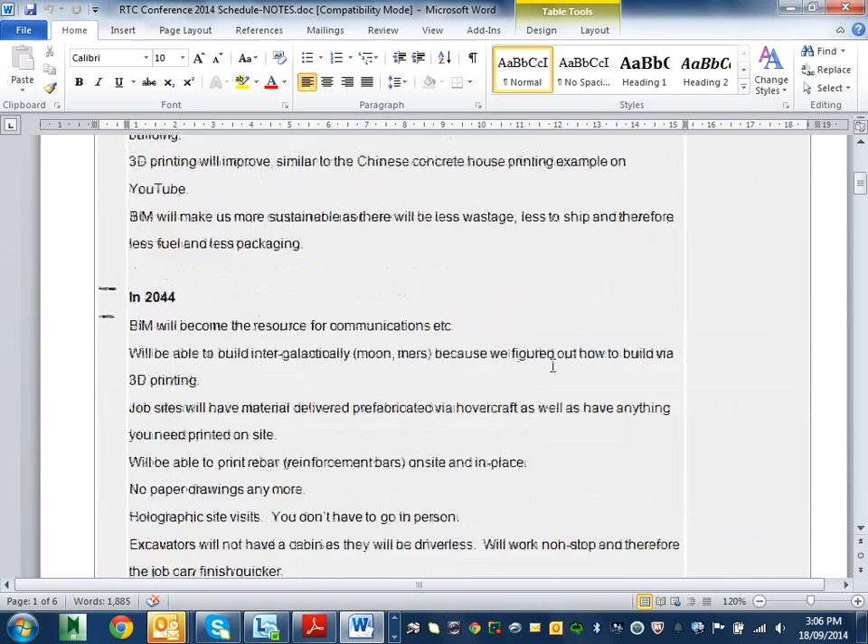We're going to talk about the Revit conference I went to in May. I took a few workshops, and one of them was called Welcome to May 29, 2044, so it's about 30 years from now.

It was presented by these guys here, and I love their little workshops, they were really good. They've had a couple of others that I've taken, fun guys. This is actually a picture of this guy here, that's me, and they belong to a company called Turis Systems. They're from America. This is one of the partners, that's his wife Anne, and that's Mike himself, young Mike.

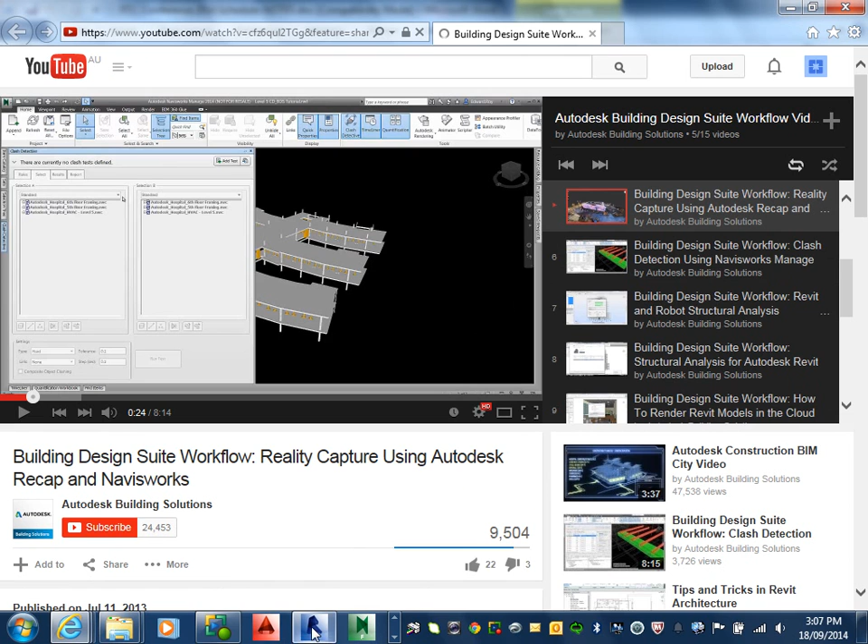I'll just close that. Oops, sorry, it's not happening, close all tabs. Let's just get rid of a few other ones while we're here. Why is this not working? Anyway, don't worry about it, it's a problem with this. Okay, here we go.

And this one here is the other guy, that's young Josh. This is the last night that we were there, we had dinner, and we could let our hair down.

Okay, I'll go on. Why is it... close all tabs? Close tabs? Alright, am I pressing the wrong button or what? I don't know what's going on here. Alright, just keep going.

So basically in 2044 we will have self-driven cars and terabyte internet, really fast internet, that's the idea. Productivity in 2014, apparently they claim, is less than it was in 1964, whereas what we've been just listening to suggests it should be the other way around, but that's what they're saying.

Interesting. They've got a disclaimer at the beginning which they popped up saying do not make any financial decisions based on what we're saying. That's a disclaimer I want to give as well.

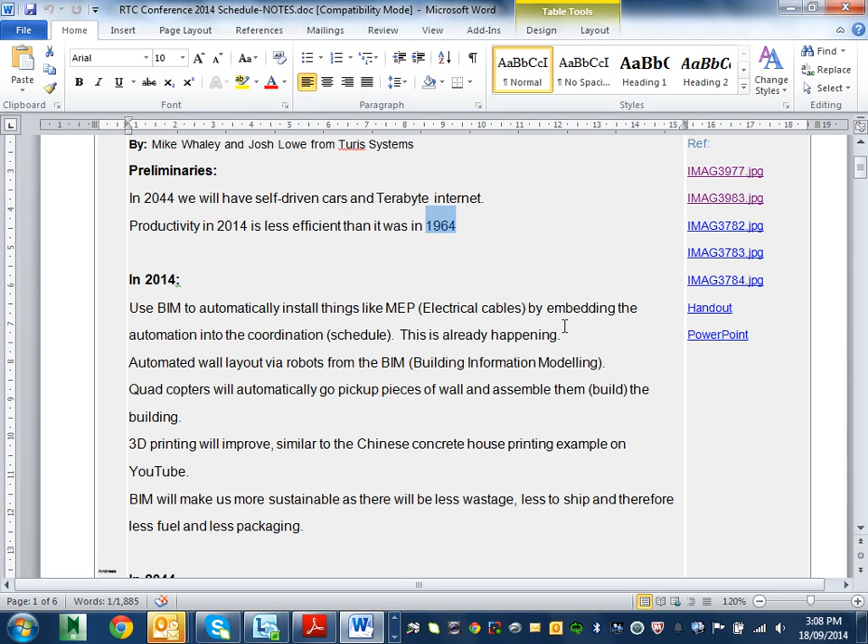Now, use of BIM in 2014, we used BIM to automatically install things like electrical cables and all that sort of stuff, and embed them, because they're automatically in the schedule, you can just embed them in the ground as well. That's the idea, and this is already happening in certain projects.

Automated wall layout via robots from the building information model - they will mark out on the ground where your walls have got to go, and then you come along and assemble it because it will come already pre-assembled, you just plonk it there. So that already happens.

Big Allen key. A big Allen key. Yes.

Well, I think IKEA will start selling some buildings, maybe. Instead of tents, they're selling buildings, yes. I've seen some of those designs as well that are 3D printed, for disaster relief. Interesting.

Quadcopters will automatically go and pick up pieces of wall and assemble them themselves. I don't know what that's doing there, I think that should be further down in the 2044 section.

3D printing will improve, similar to the Chinese concrete house printing example. I'll just YouTube it and you'll find it. I've shown it to my other students earlier, and I might get an opportunity to show you in another lesson.

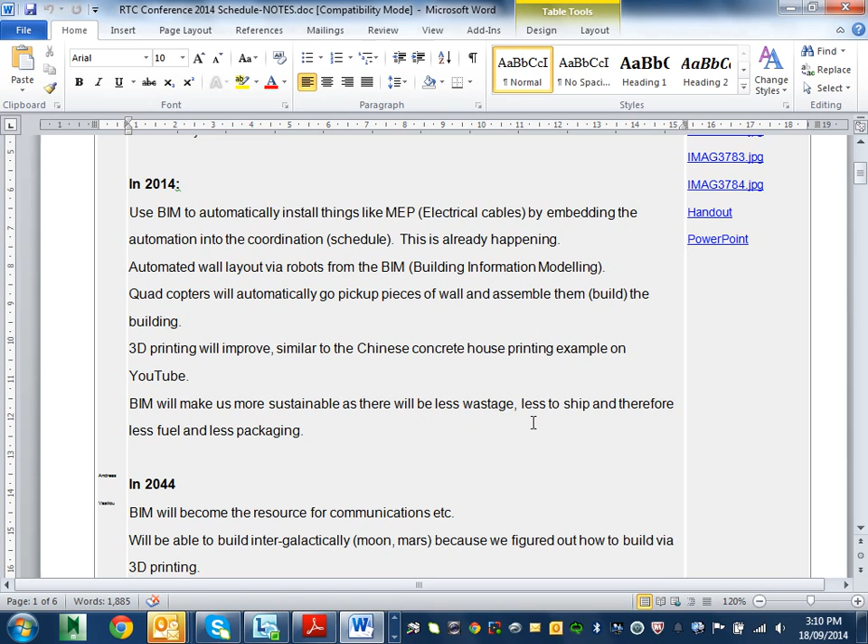Okay, BIM will make us more sustainable. There'll be less wastage, less to ship around, less fuel, less packaging, all that sort of stuff. In 2044, BIM will become the resource for communication, etc.

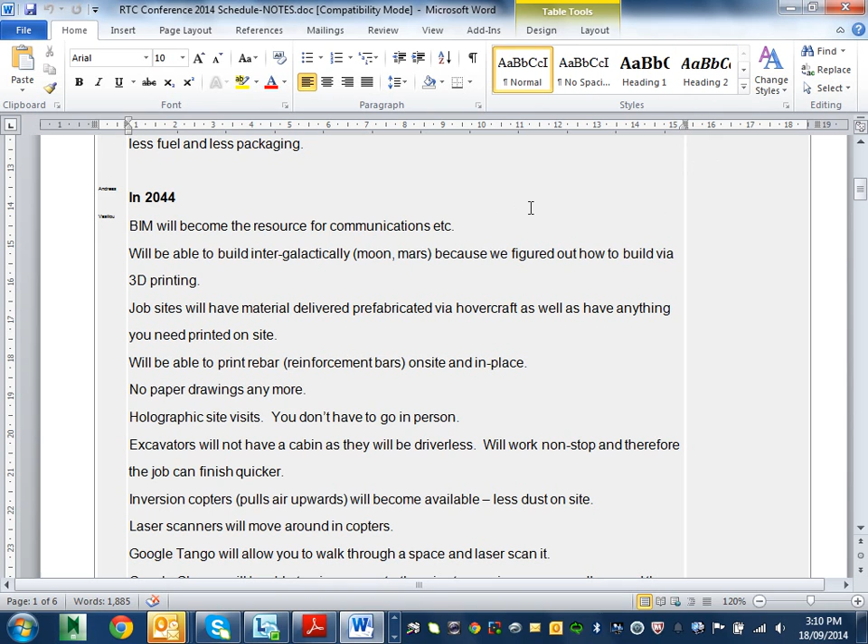This is actually not the best way of doing it, because as I said, these are the guys - this is their view of what Melbourne will look like in 2044.

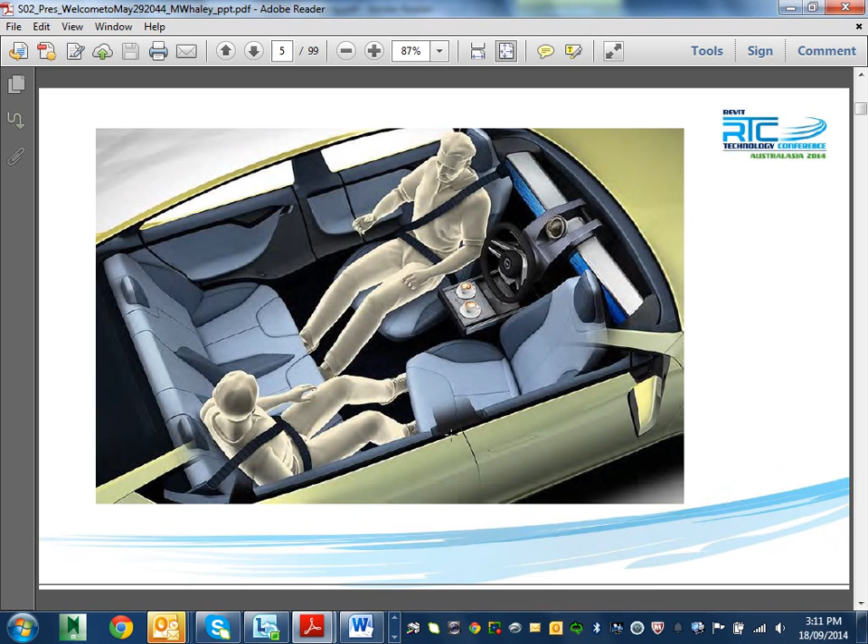Who are these guys? I don't know, I thought it was the Flintstones, but apparently it's the Jetsons, is it? That's it. Anyway, we'll have driverless cars and that sort of thing.

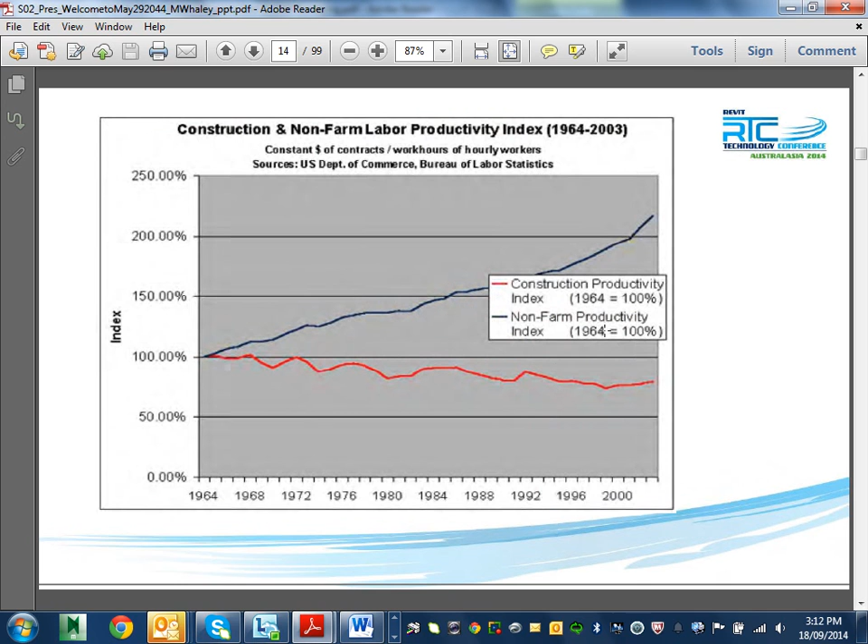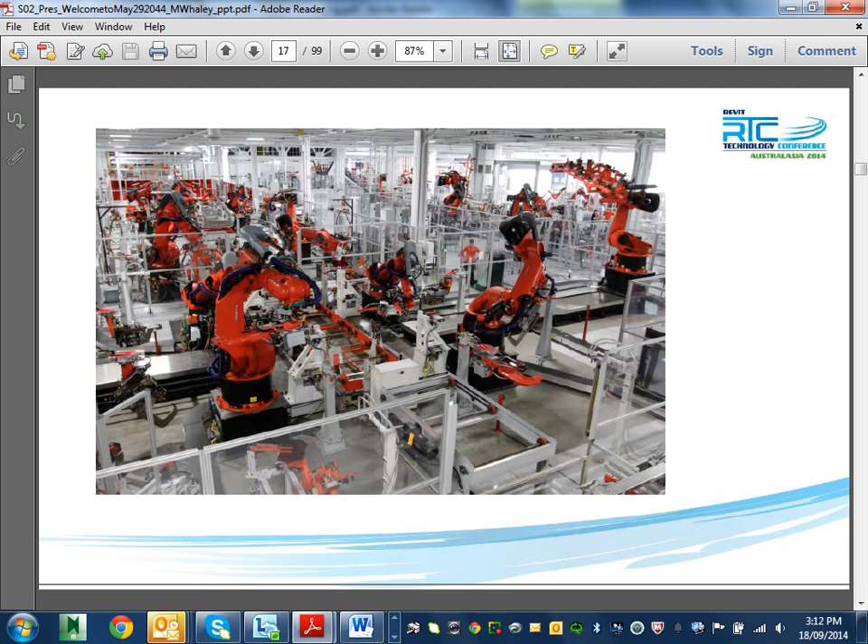This is the 1964 example that they're justifying with their figures. Robots, yeah, we've already got this sort of stuff happening around the house, vacuuming. Automation is already happening in the automotive industry especially, but we're going to see a lot more of that coming into the building industry.

All right, so let's check that out.

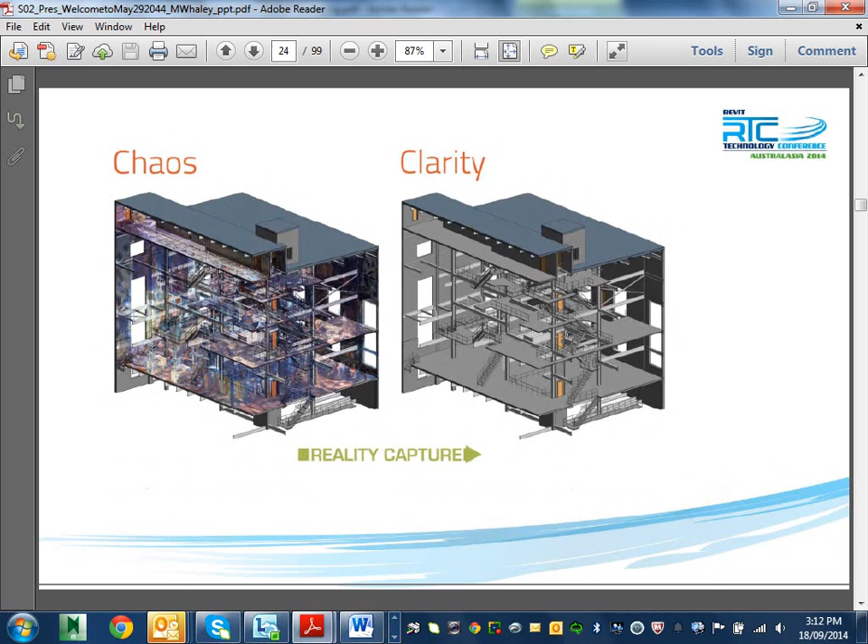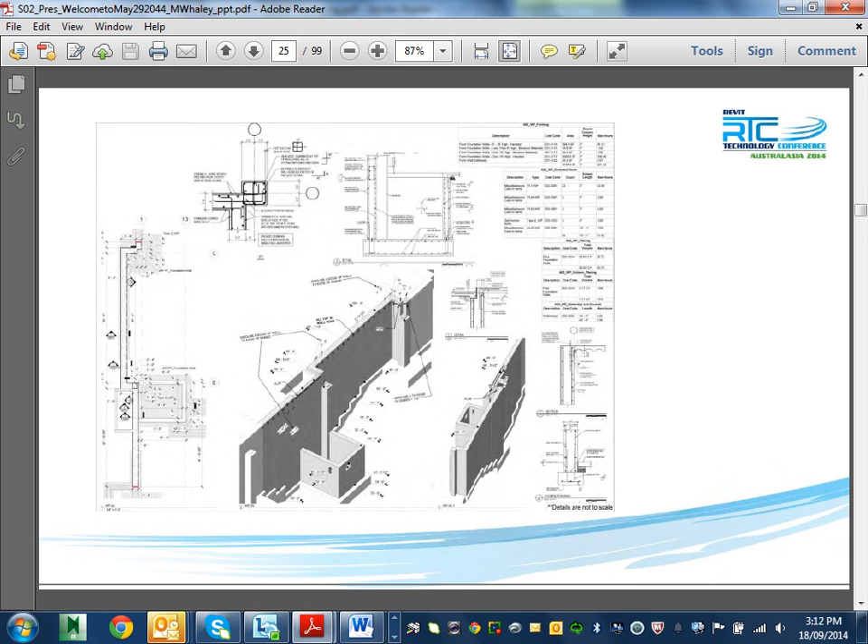All this stuff, as I talked about before, being able to lay cables in and automatically build trenches using programming of the machine - the machines are already doing that. Graders already run by GPS, using downloaded data to work out the level. The driver is sitting in there but not necessarily doing anything with it - it just goes up and down and finds the right level.

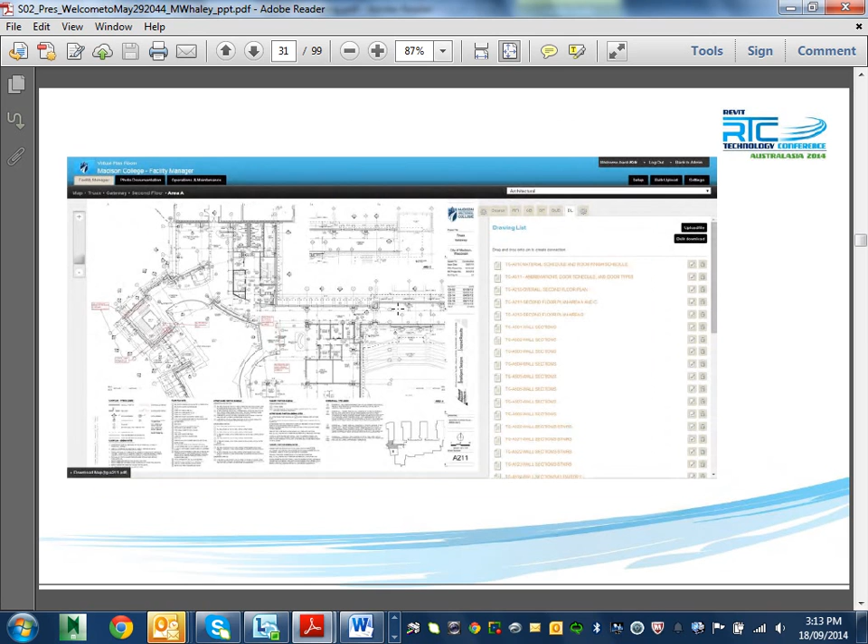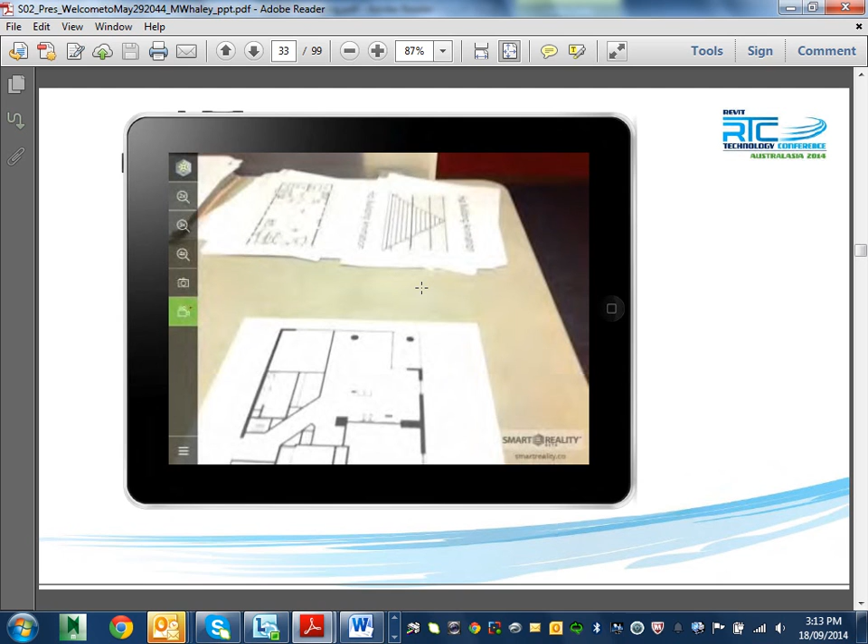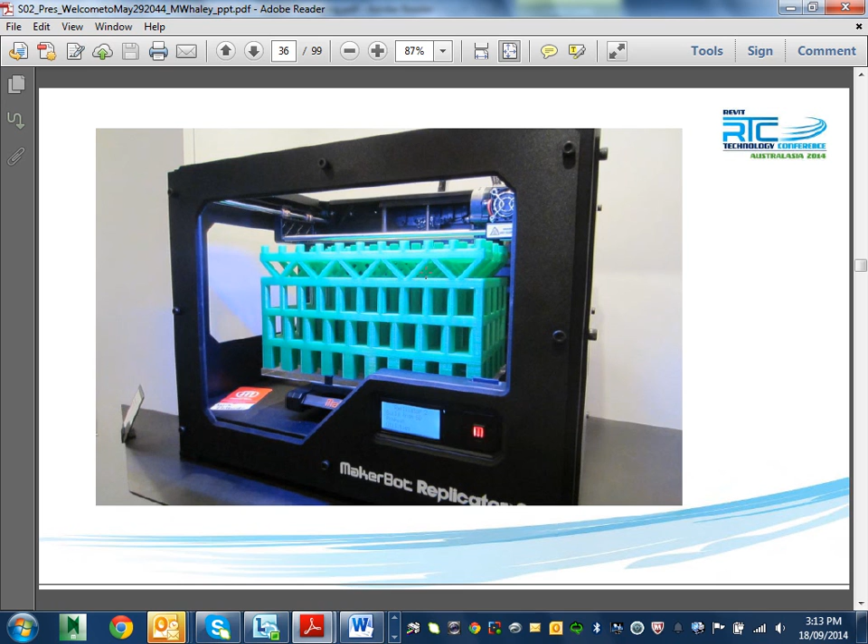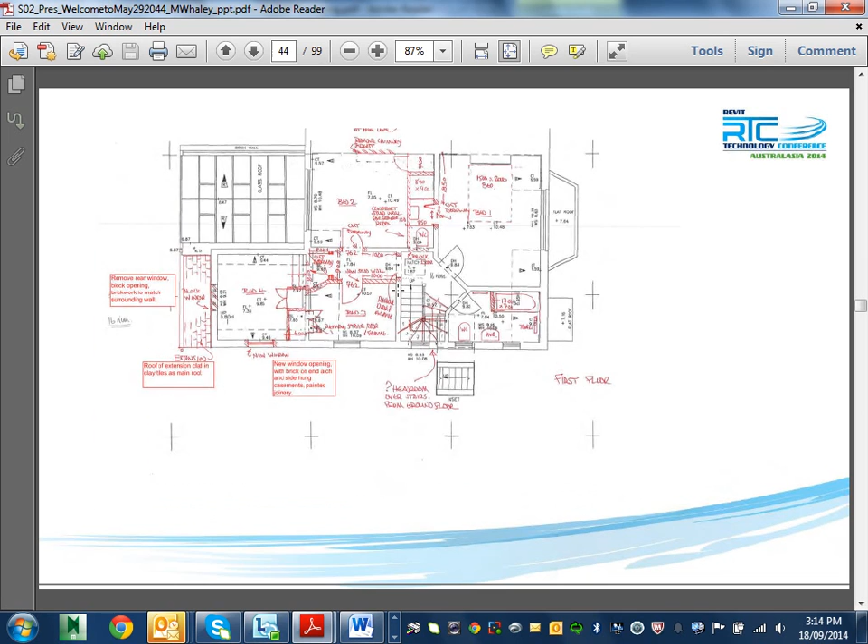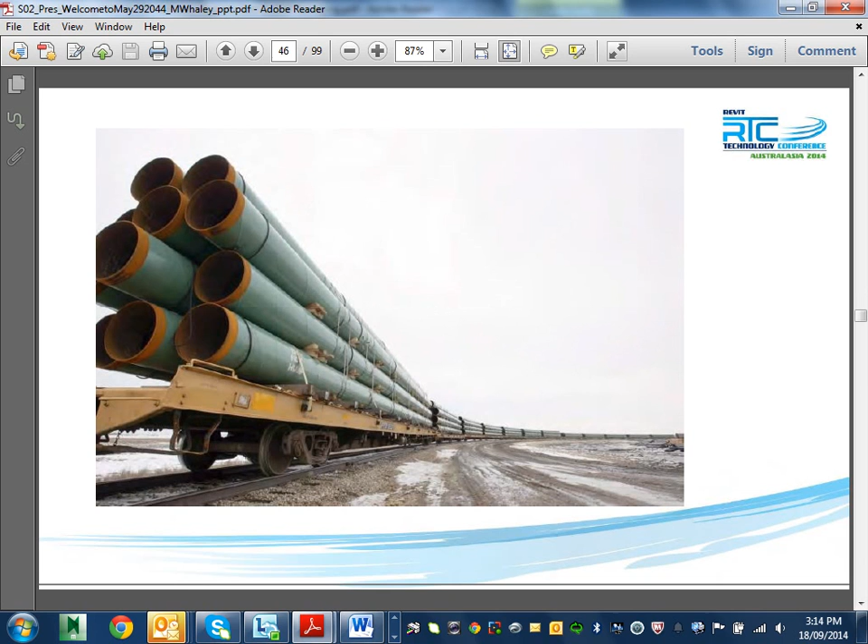That's the state of construction in 2014, or a construction site - all this wastage and mess. That's a drawing office with a lot of files and markups. Yep, danger, transporting stuff, as I just mentioned before. A lot of the materials are going to be able to be 3D printed as well on site. That's the idea - less danger.

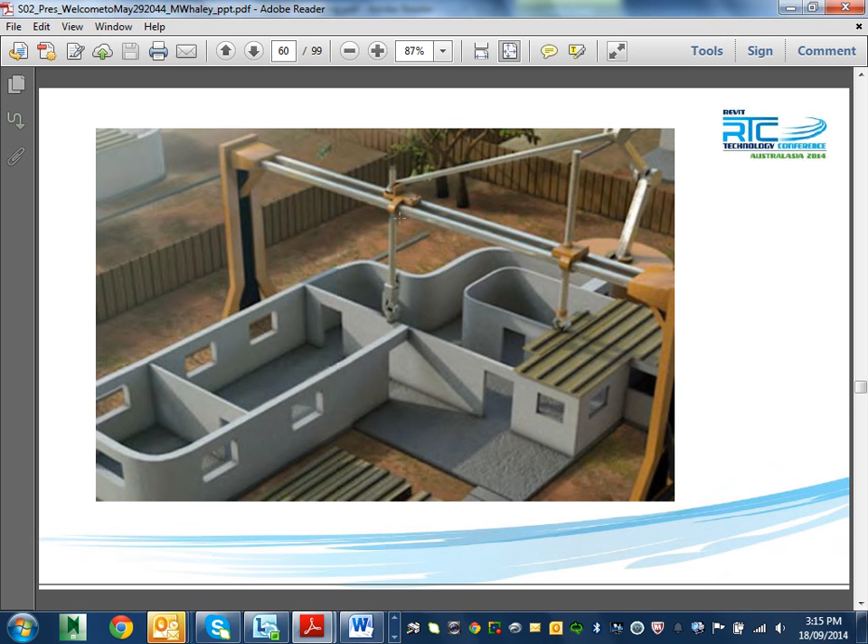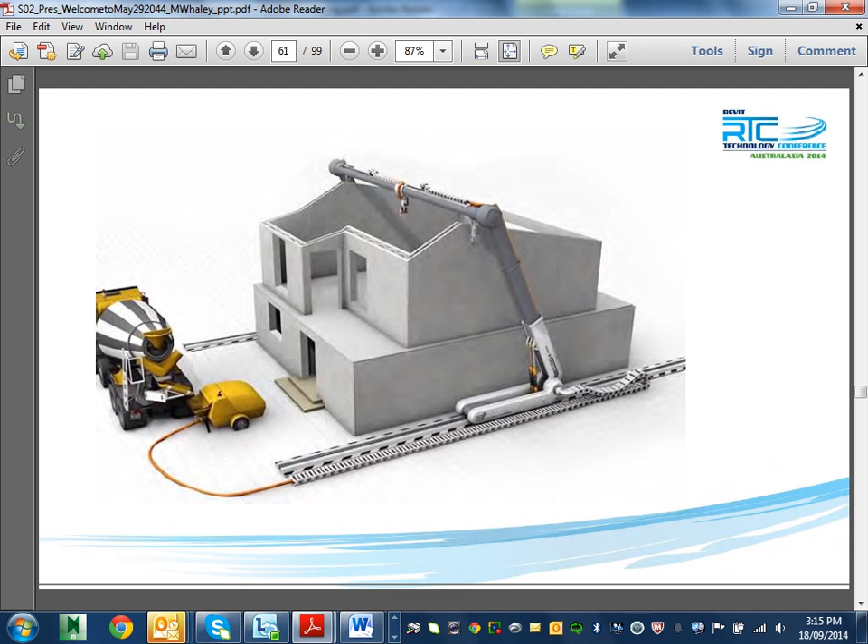Now this is more like what the site's going to be in the future - apparently these quadcopters bringing in all the just-in-time materials you need on site. So there's that, and another 3D printing machine - here's another example of a 3D printing device building a house. It's probably another Chinese one. At the moment, this is where we are - experimenting with different machines and ways of doing it, and there'll more than likely be a few different variations we end up with. Modules coming in.

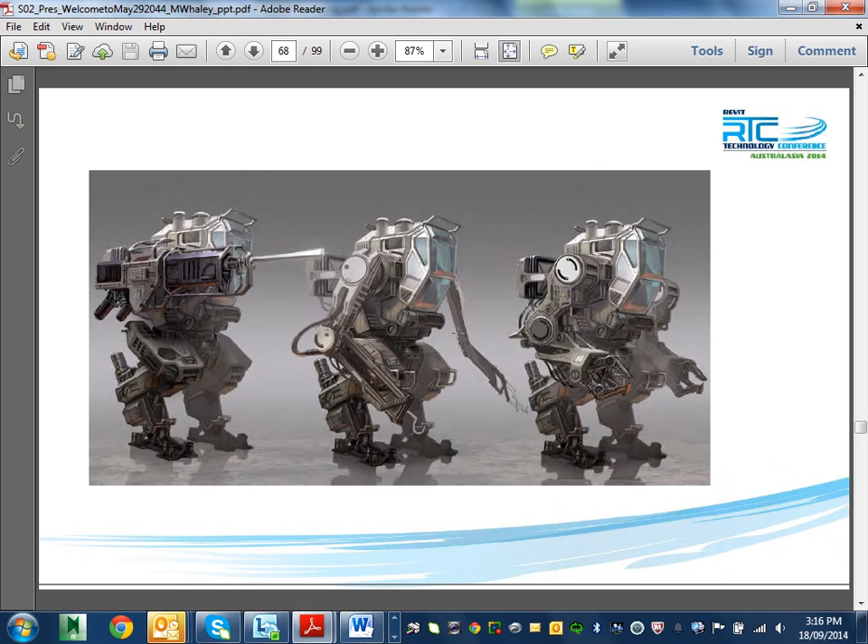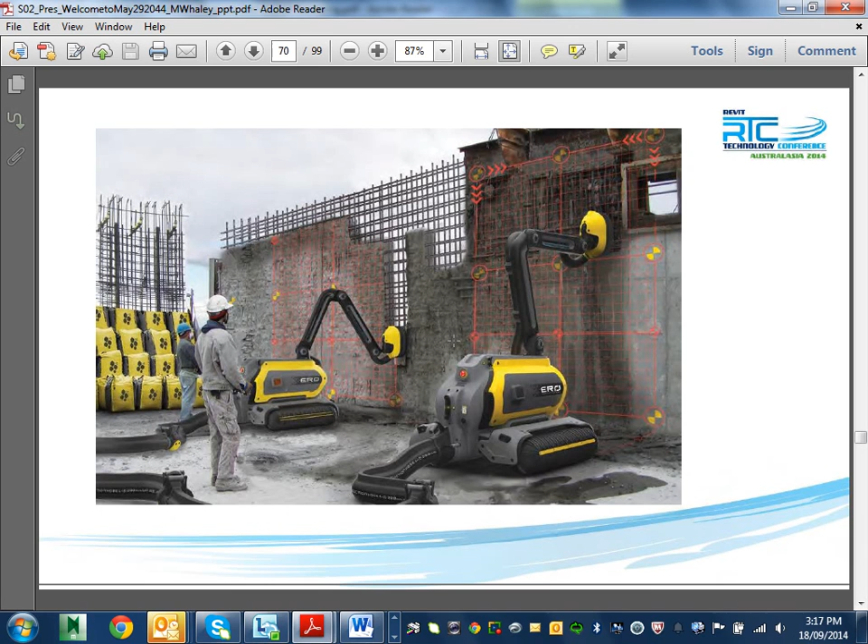Don't know what that is - machines. Okay, I think this is one of the videos I read about just before. That's a layout of the walls, but this is actually 3D printing of walls, so you don't have to do it by hand. There's even a rendering machine - if you put up a wall, a machine goes along and renders it for you.

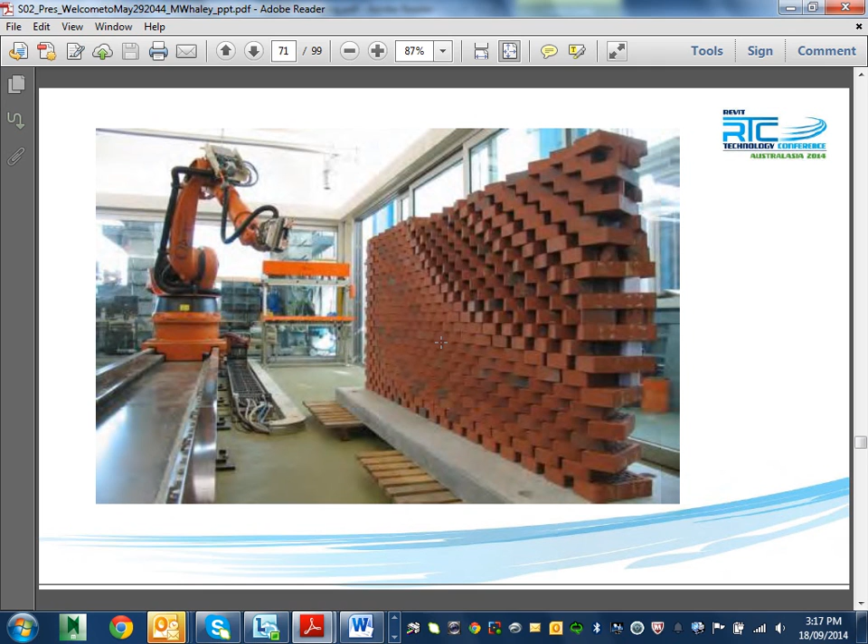A lot of the conference, not just this one, talked about how you'd be able to build stuff without actually having any connections. This is just brickwork, but it's demonstrating how a robot can put together something complex a lot easier. The way we're heading is also toward not having any connections or fasteners - glues, screws and bolts - instead you design it so it clicks together a lot more easily and safely.

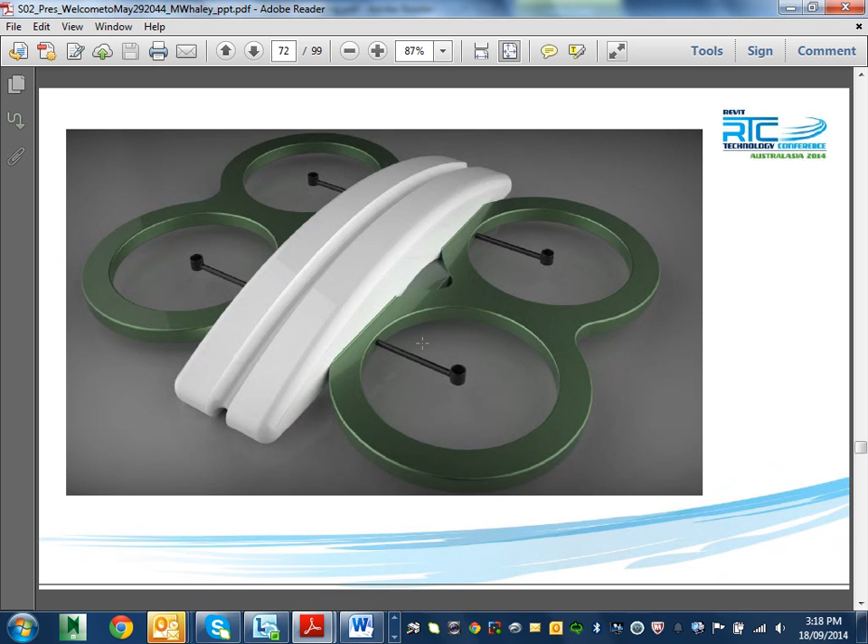Well, there is actually something in China. It's a well-known place in China, built out of bamboo, with not one nail or bolt in it. It's just been done. That was 3D printing from back then.

All right, so these are the quadcopters of the future, I suppose. There you go, here's a module coming in for you.

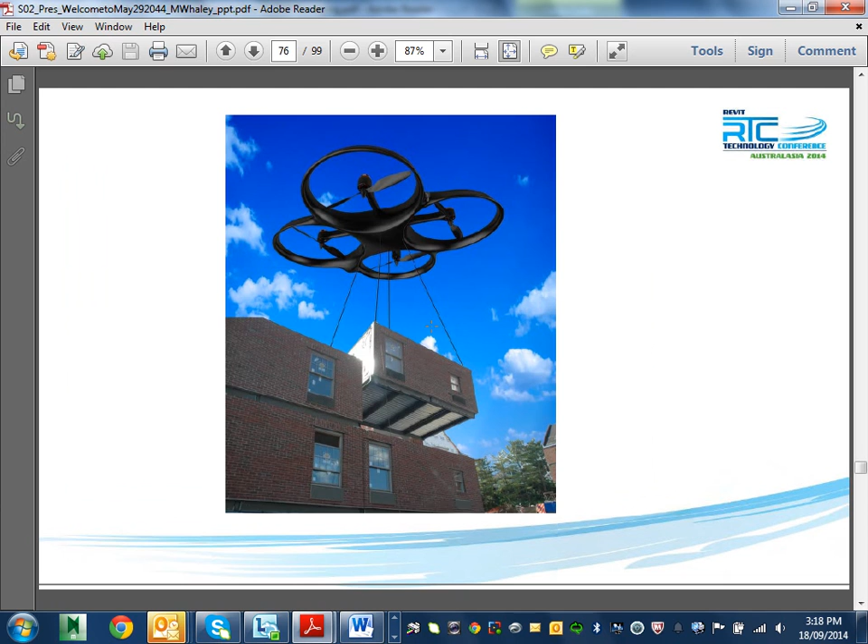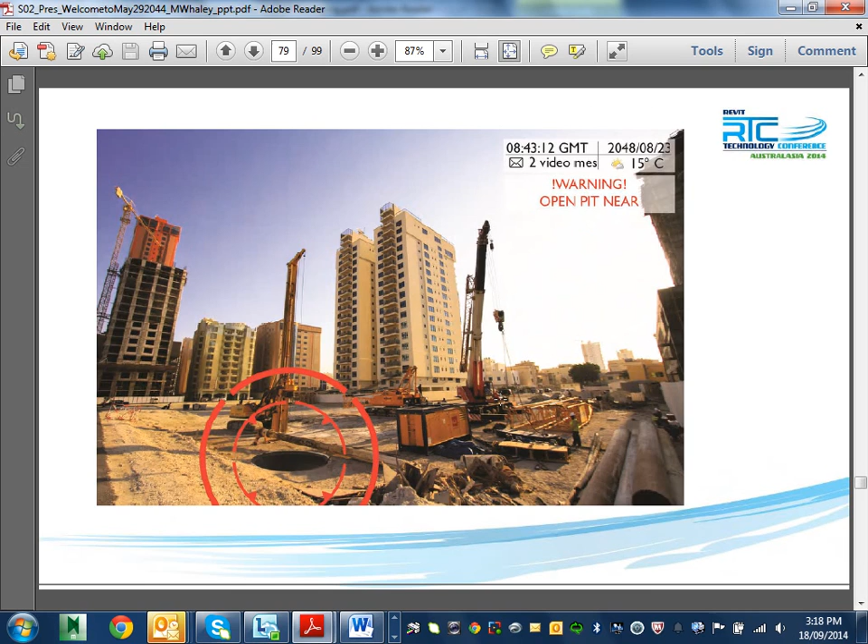What else? Being able to warn you, open pit nearby, so it warns you on site what's happening. This is the future, being able to see better at night without having any aid.

Hey, put the lights on. No, it's still the same lights.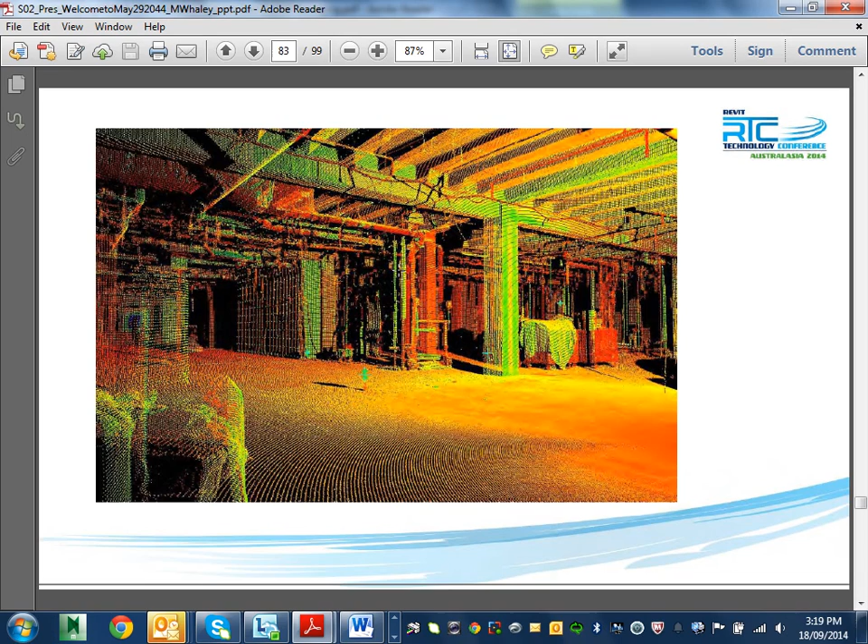So as I said to some of you before, you'll be able to do the 3D, do the pour. Before you do the pour, you'll be able to scan the place, and a lot of iPads will be used on site to walk in.

And what you do, and I'm not sure if we're going to have a picture of this, but as you're walking through it, what it sees, it actually overlays the actual model on top of it. So that's another way of checking if things have been put in the right spot.

You might have an empty room, and you can just go look, and if you're installing your lab benches in there, you have the lab benches on your iPad, and by moving around you can see the bench in the empty room in situ, and see if it's been put in the right spot and things are going to line up. As I said, before you pour something, you can take a scan, put it into your model, and get the clashes out before they actually pour.

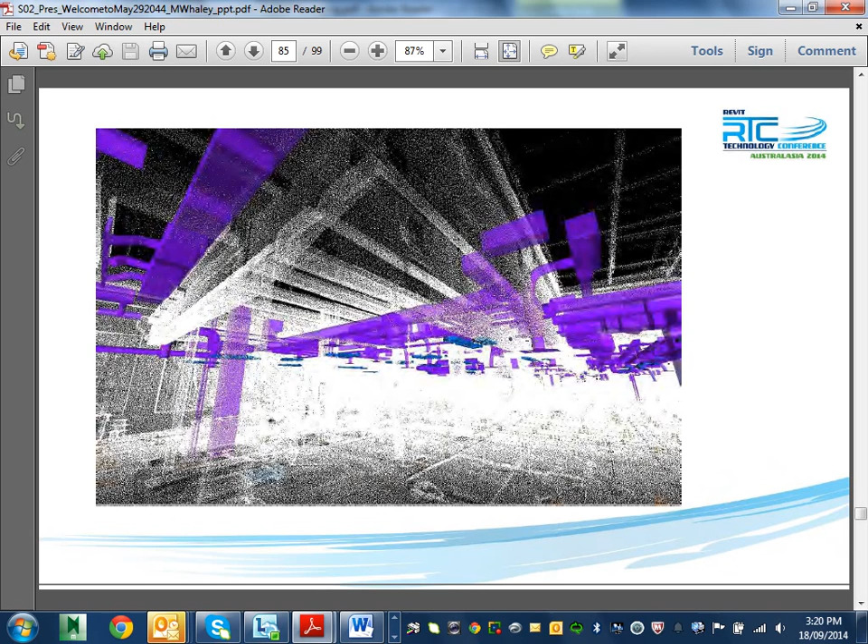So it's tradespeople, that will be the tradespeople of the future. Basically, yes, there'll be skilled people, but they won't necessarily be in carpentry. They'll be more skilled in actually programming the machines.

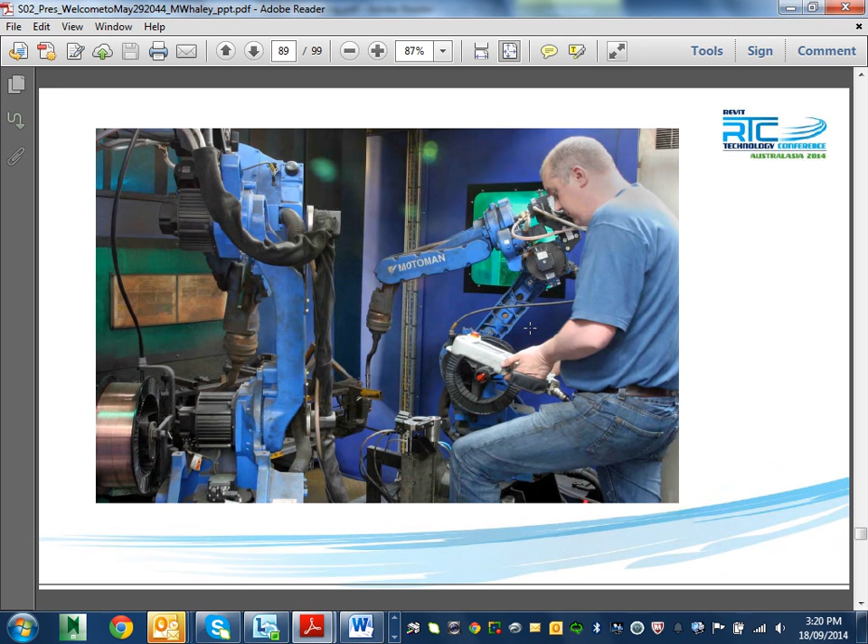Business process, what else is there that's interesting here? That's it. What's this guy here? All right, well, that's the guys there. Questions? No, all right, so that's basically that one there.

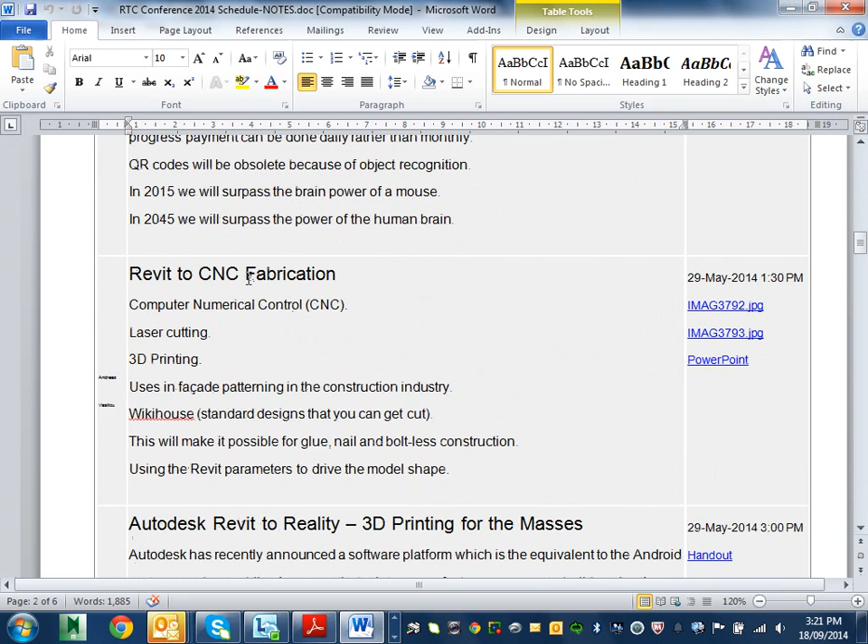CNC fabrication, that will happen, yes, that's part of the 3D printing family now. Autodesk Reality, 3D printing to the masses. Yes, all right, what else was there?

The future of BIM collaboration, work sharing, or glorious gadgets. This is interesting here, a few gadgets we had a look at there.

Let's just have a look. Point cloud scanner prototype to plug into your iPad to scan into. So there is a prototype already, and they had that there at the conference. So through your iPad, collaboration.

That's something else, converts into a couple of different formats or something. The other thing is, and I'm not sure if we're going to come to it.

We probably will, it might be here, but in the future, you saw those little quadcopters running around. They'll also be used for point scanning. At this point in time, you did see the ReCap where you took a whole lot of photos. In the future, you'll be able to use the quadcopters to just race inside the house a lot easier, or inside the building and outside, and take a whole lot of point cloud data, without the need of actually having to have a station as such. It'll just happen a lot easier.

It's just a matter of taking these things, videoing the place, and it'll come back as a point cloud instead of video. So that's the sort of stuff they're working on. The whole landscape of everything we know now would change in the near future, including surveying especially, because in the past few years point clouds have seen a huge uptake, and how we can use it and where. You're seeing a few examples today, so your job is very important in the future of construction and other areas.

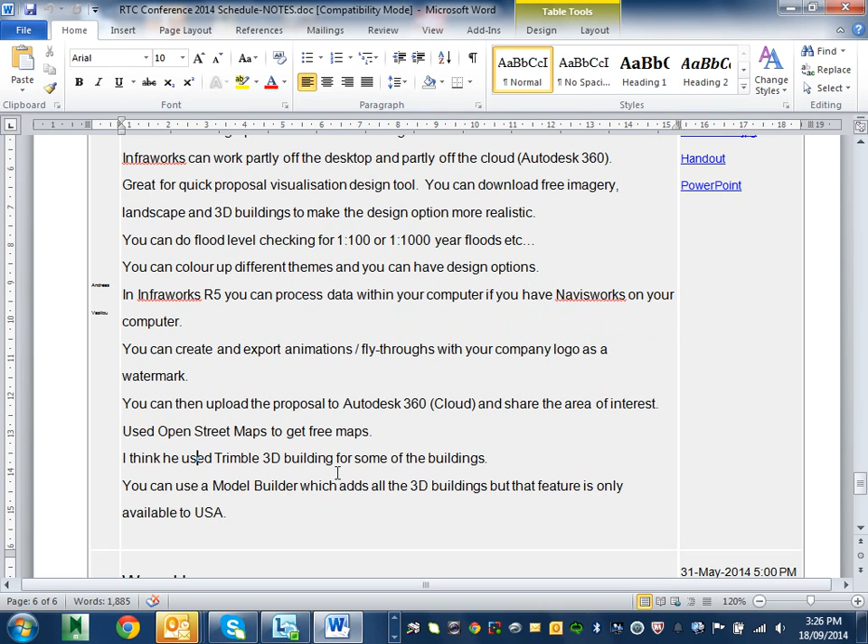Alright, so what I just alluded to before - I think there's an image that shows that. I'm not sure which image it is. Oh okay, here we are, images, there's a few images there, let's have a look. This is Infraworks, which is basically a bit like Civil 3D, but more in the cloud realm, more like BIM. It's interesting here.

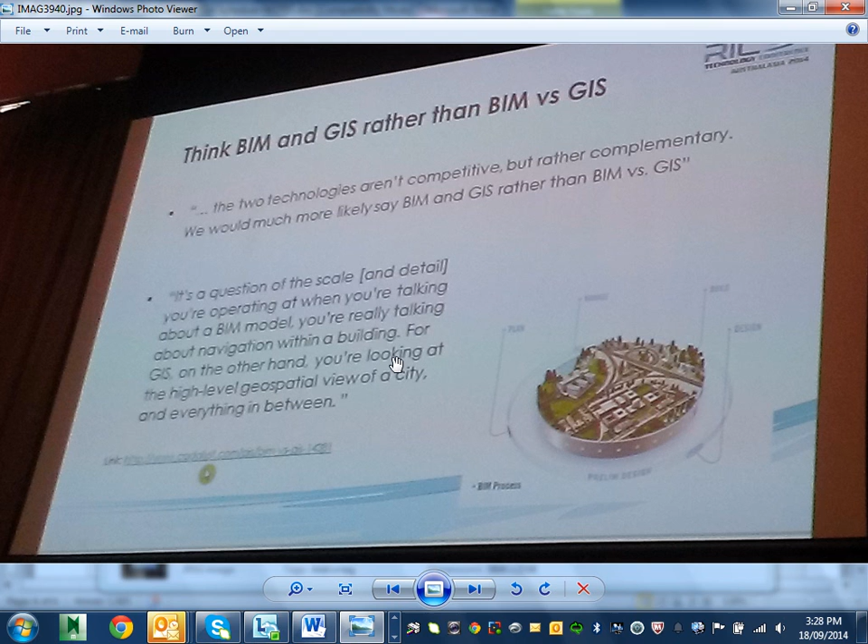Think BIM and GIS rather than BIM versus GIS - the two technologies aren't competitive, but rather complementary. We would much more likely say BIM and GIS rather than BIM versus GIS. So it's a question of scale, it says. As we all know, in a building it's just a baby GIS, and then you put the building on the site and it becomes GIS. From what I can see of it, it's a kind of GIS - different things that layer on top of each other with information, space and locations. Yeah, that's right, that's what it is. With GIS you're just getting general geographic information, but then you can go into it even further if you had a building that's already there.

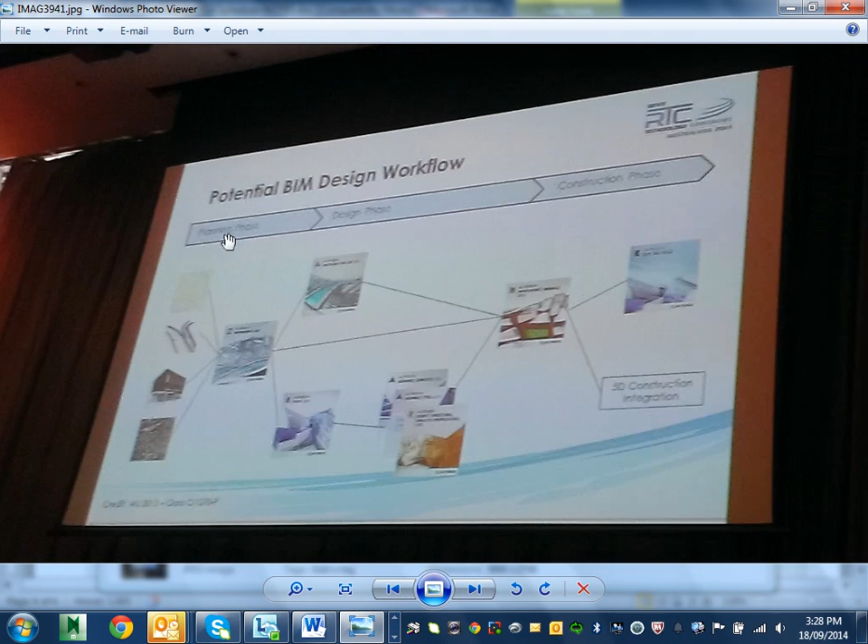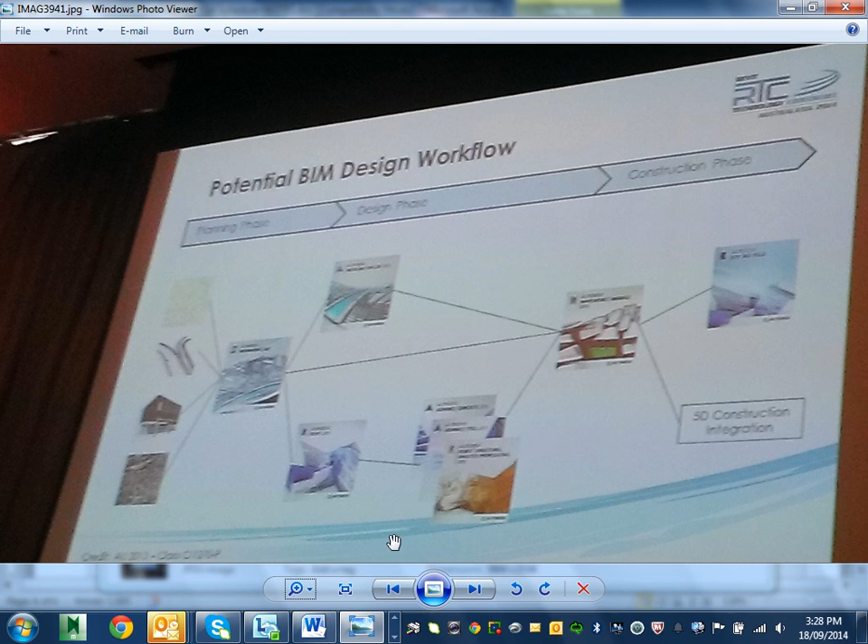So this is a potential workflow using this software called Infraworks. Can't see it from there very well, but anyway it demonstrates Infraworks, and it goes into Civil 3D, then it goes into Navisworks and that sort of thing. So that's what that is, that's about it on that one.